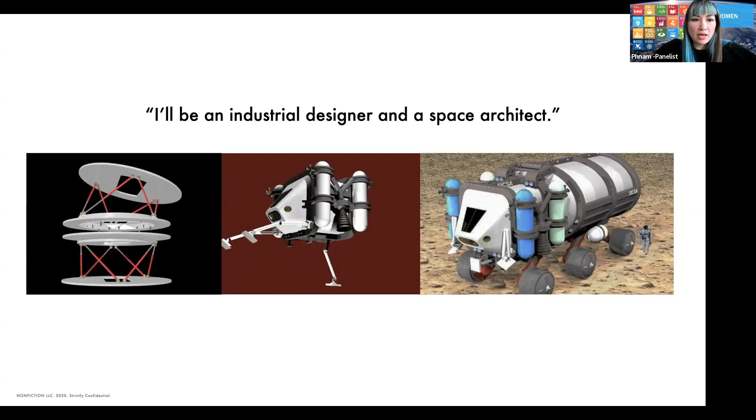This is the type of things we were working on back then. As you can see, fairly classic space architecture - pressurized rovers and hoppers and systems that help dock parts together.

But then a few years ago, after practicing industrial design for about 15 years, I decided to think about what my life purpose was. So after going through a whole exercise, I realized that it was turning science fiction into reality for a better future - thinking about the future as this beautiful thing that we can build for ourselves.

So I started this company called Nonfiction 5 years ago. We're based in San Francisco, and that is exactly what we do. We do more than design, we do more than architecture. We really try to build the world to be this beautiful place.

One way we do it is that we attract clients that have a commitment to at least one of the 17 Sustainable Development Goals put together by the United Nations. Some of them have to do with health and well-being, some of them have to do with gender equality, some of them have to do with the environment or clean water.

Another thing that happened recently is that Nonfiction became a member of MIT Solve, which is the social impact branch, kind of like an accelerator program where we help a team or startups find solutions that can have a positive impact on the entire planet.

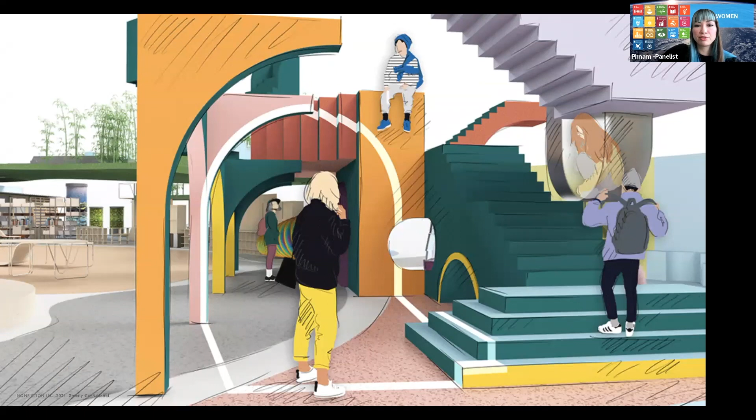We're also redesigning the educational system of the country of Singapore, completely redefining what it means to be in an environment designed to develop your autonomy, your creativity, your critical thinking, and all the tools that will make the future of work a lot more pleasant for everyone. One part of this program was really integrating sustainable practices, exposing children to beautiful sustainable materials and fabrication models they can access, so they can fabricate the world that works for them.

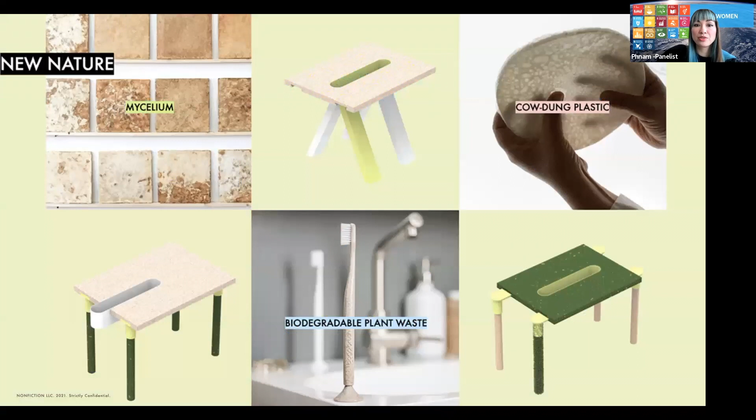And related to materials, Nonfiction is now an official partner of Material ConneXion, and so we host one of the largest sustainable material libraries on the West Coast of the United States.

We also work on the interior of airlines, completely redefining what it feels like to be in first class, business class, or coach, integrating technologies like vibroacoustics, sound technology, scent technology, and nature into the environment, so it becomes more like a spa than just a transportation device. Reinstating pleasure in flight is very important, and integrating technology that supports not only the people taking the flight—on vacation or a business trip—but also the people who work there. Integrating a bar back into flights could be really cool, and why not think about what that could be in space as well.

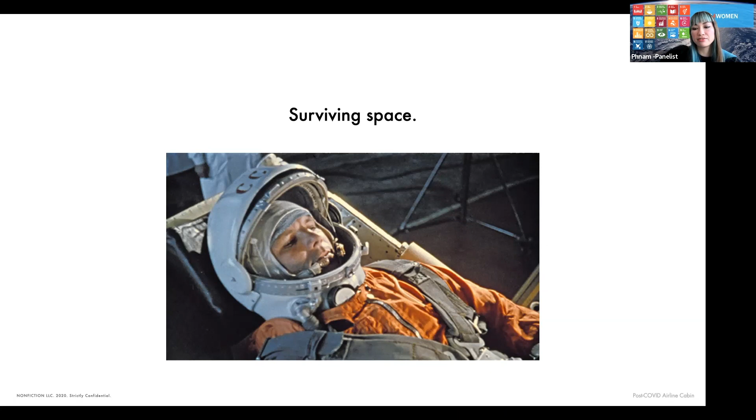So now back to space. The history of space travel, of humans in space, started with surviving space—how do you send a man up to space and bring him back alive? That's what Yuri Gagarin started doing in the 60s. And now you have people living on the ISS.

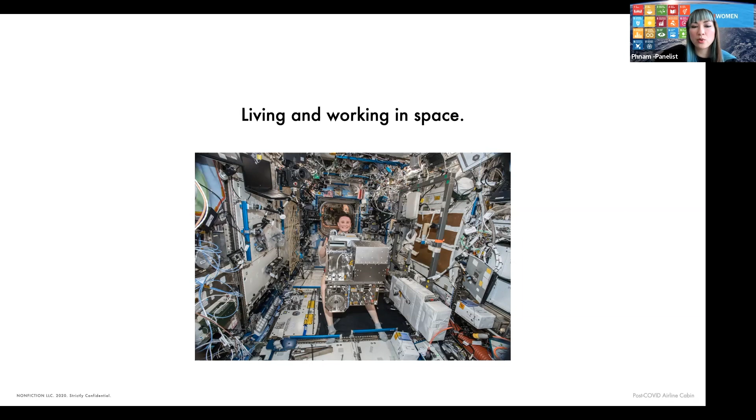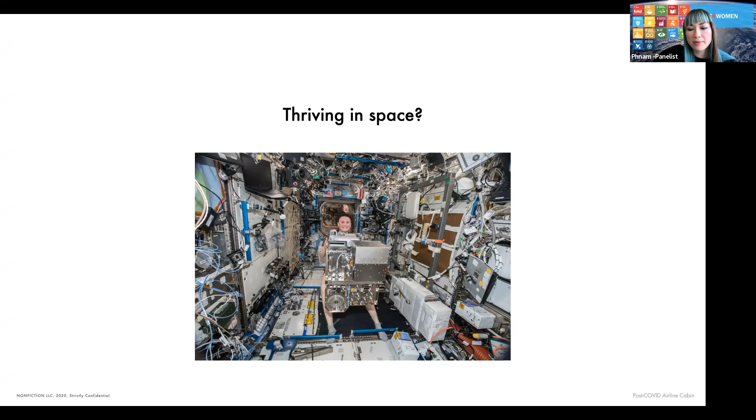It's about living and working. As you can see, the interior of the ISS, as useful as it is for the people doing experiments and living up there, is quite a mess. It's not something that seems pleasant to be around and to float around in, and from the perspective of a designer, I actually find this type of environment to be quite dangerous. So thriving in space, what is it going to look like? It's our job as space architects and designers to figure that out. So let's jump into it.

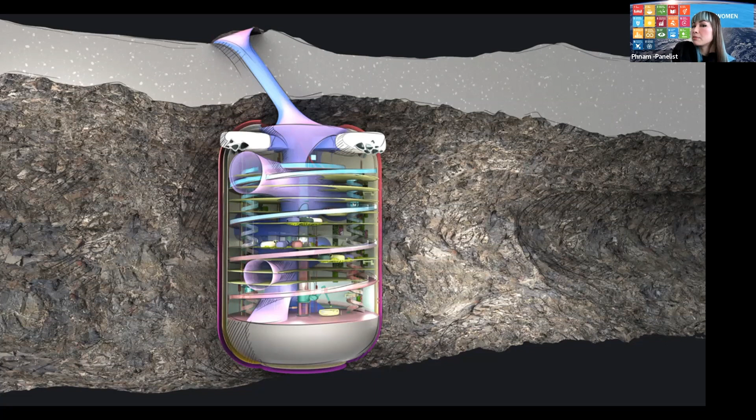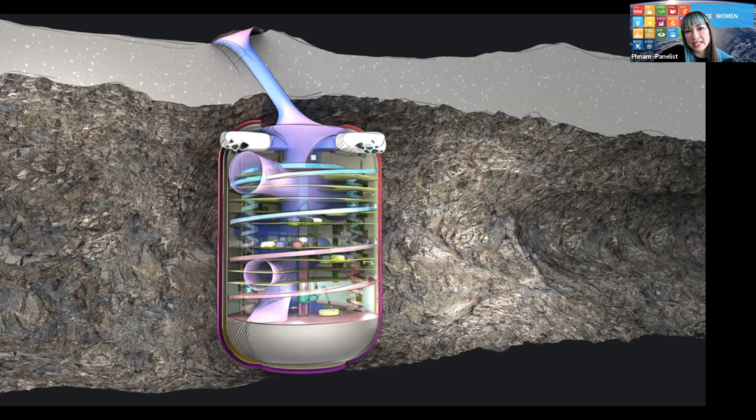So it can be very useful to build underground. And when you build underground, you have control over the entire environment, the lighting, the circadian cycles and all that, by using a set of LED lights.

And when it comes to the interior and the home pods, how do you think about how it feels to be in this environment? So this entire structure is not made for the first return to the moon. This is going to be quite a few decades down the line when we send tens of people to go there and work for long stretches of time. And so when we think of the interior, we think very much of serving the humans who are going to live and thrive in there first.

The human body, for example, does not have any straight lines. So why should we live in an environment that has straight lines everywhere? So let's integrate a lot of these natural shapes, these curves everywhere, integrating nature and textures, things that you can touch and things that feel good when you look at them.

Same thing for the private quarters. When you invite someone in, when you are in your private space, how does it feel to be in there? What kind of colors, what kind of environment, what kind of materials and texture is it going to turn into an environment that feels like home?

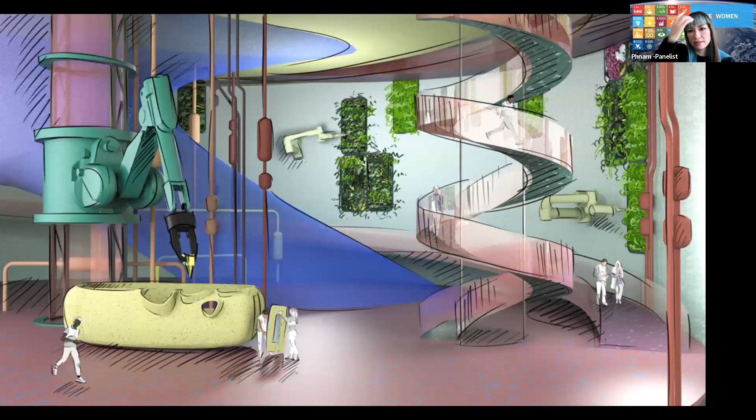And same thing with working environment or fabrication, using 3D printers and that kind of technology to build all of these structures on the inside. Partially using materials sent from Earth, but also using local materials like regolith and mixing them together to create structural materials that allows us to print really cool shapes.

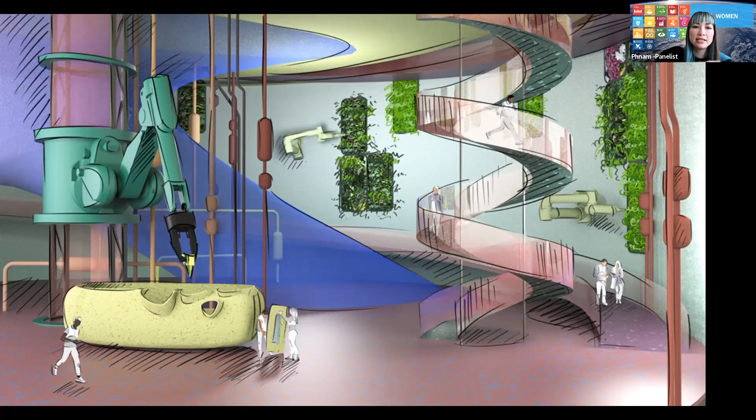And in all of this, integrating as much nature as possible, not only to feed ourselves, but also to create an environment that feels a little bit more like home, even if it's a work environment.

Same thing for resting or working out environment. Why do we have to use tools that look like they were put together in a garage using tubing and parts that are 3D printed? What we can do is really make the workout environment a pleasant environment, using moving tools, and perhaps some of it can be physical, the impression of running on grass, for example, and some of it can be digital to really expand the way we perceive the interior space of this capsule.

And the last project I wanted to go over is actually a project that we did with the WDO and the ISS National Laboratory last October. And it was designed in space for life on Earth. And my team of 14 people actually focused on designing the future of an orbital university.

So all of us 14 people were complete strangers, coming from different places on Earth with different backgrounds. Some of us were architects, some of us were designers, some of us were astrophysicists and systems engineers.

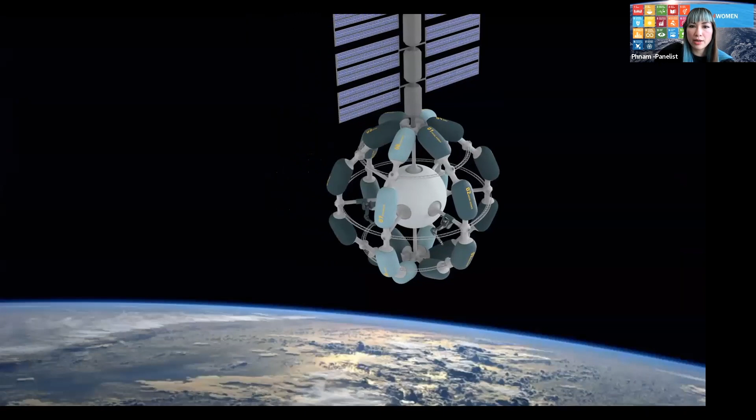And so the way this is built is that you have 3 rings that are connected to each other. And what we would want to do is to give access to each of these inflatable pods to researchers, staff, faculty, and students to have access in space, and really using the microgravity environment to push their research and their development to the next level.

And so one way we thought about it is, growing food in space is very big right now. And for example, NASA has a food challenge out right now.

If you guys want to participate, that sounds super fun.

So how do you bring back pleasure and textures and all those beautiful flavors and scents that make food on Earth so pleasurable? How do we bring that to space? How do we make going to the moon or going to Mars, which is going to take a very long time, make food a very pleasurable aspect of it?

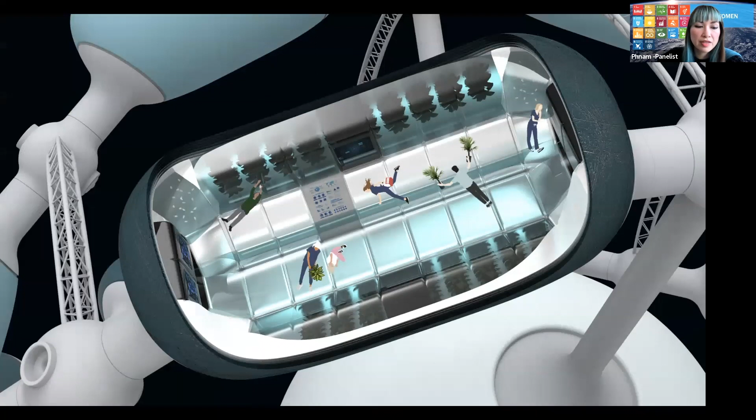The way we thought about it is having a research facility up there that would help grow a wider variety of food. When you think of hydroponics or aquaponics today, the type of food they grow is quite limited, right? You can grow lettuce, capsicum, which are like peppers, some fruits and berries, but you can't eat only that kind of food for the rest of your mission. So creating things like this.

Another thing is art, art in space. What can we do there? There's an artist named Azuma Makoto who has been sending flowers and bonsais and these beautiful living things up to space. There's a beauty in this that we can really replicate with student artists in space. What can you do in microgravity? What are the limits of what art is when you practice it in space and when gravity is not working against your imagination?

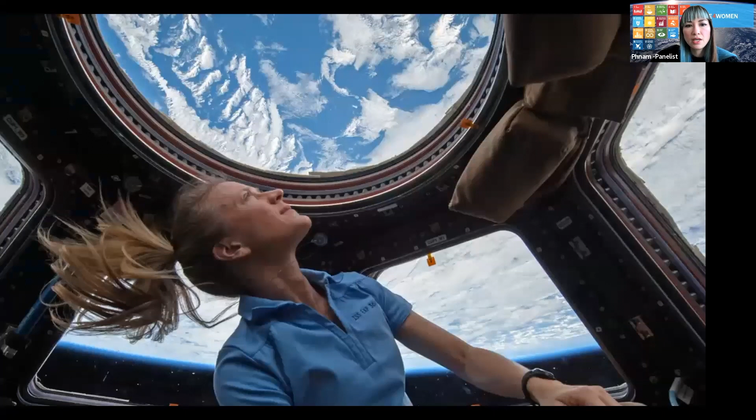So, to finish this whole talk, some of you have probably heard of the overview effect, talked about a lot by Frank White, a sort of space philosopher who has interviewed countless astronauts. Pretty much all of them have experienced this cognitive shift when they go up to space and look back at Earth and realize it is a very small, very fragile place that we as humans have to protect. We have to develop all the technology, on Earth and in space, to help protect this beautiful place that was given to us.

And why are we doing all of this? We're doing all of this for people all over the world, for the next generation, for girls like this girl who lives in India and dreams of space and wants to use space technology when she grows up to help the community she lives in. There's countless people when you talk to people in Nigeria, in Ghana, in India, in South America, everywhere. The kids are very excited about space and they want to be part of it, and they understand that going to space is going to be making life on Earth a lot more beautiful and a lot more human.

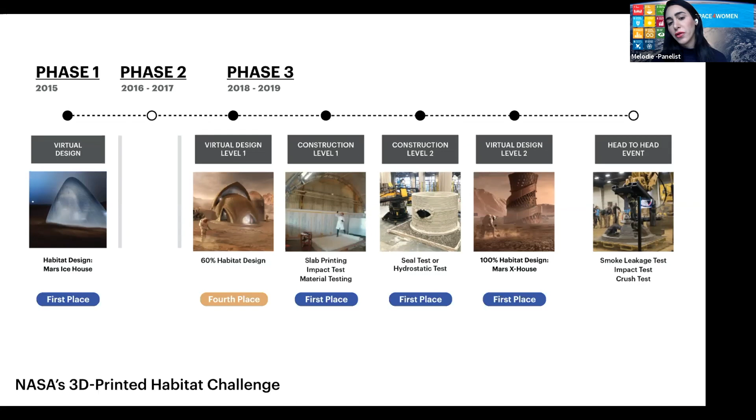This was the trajectory of my involvement in the 3D Printed Habitat Challenge. In phase 1, this was a collaboration between Clouds AO and SEArch+, and in phase 3, a collaboration between SEArch+ and Apis Cor. We competed in both the virtual design levels and the construction levels, and I'll tell you about some of these projects shortly.

Mars Ice House was the first prize winner in the phase 1 3D printed habitat competition. This was a design proposal for a 3D printed ice shell contained within a precision manufactured ETFE inflatable membrane. In this section perspective, you can see a double ice shell surrounding a vertically oriented lander, with the ETFE containing these elements and the shell structure so the ice doesn't sublimate on the surface of Mars.

This is a view of the top floor of that lander, where we imagined vision windows through the ice so astronauts could see the Martian landscape around them. And here's a view of the structure at night.

We were interested in the idea that the ice shell itself could provide translucency to the outside, providing natural light so astronauts could maintain their circadian rhythms. We were also interested in the potential for the ice to act as a superior radiation shield compared to other traditional materials used in space structures, since water, being hydrogen rich, is a better shield against galactic cosmic rays and solar particle events.

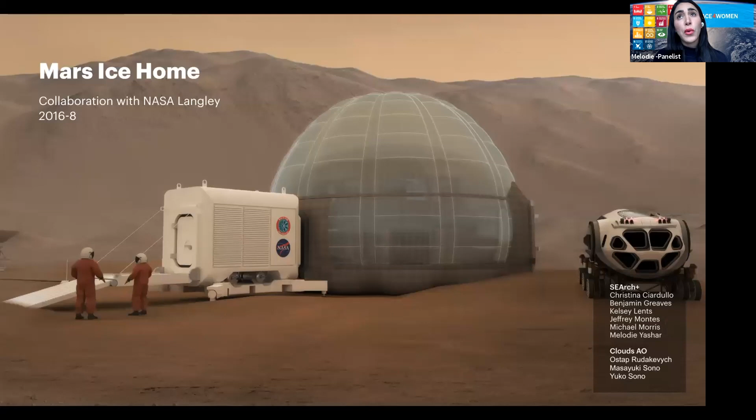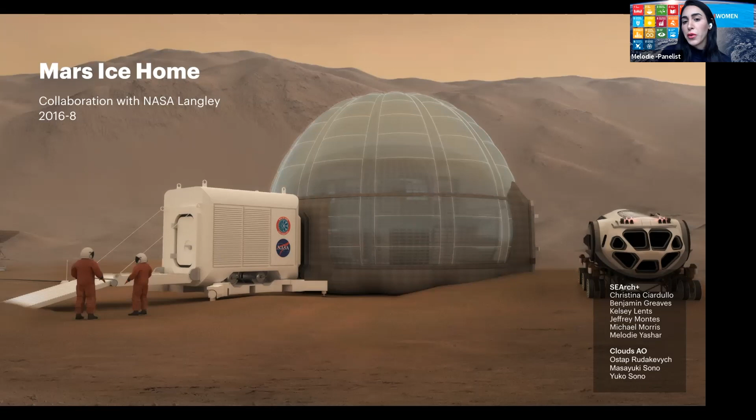Fortunately, we were able to connect with a principal investigator at NASA Langley who was interested in the idea of an ice home, and together we collaborated on this concept for Mars Ice Home, which is not a 3D printed habitat, but in fact a filled and frozen ice shell structure.

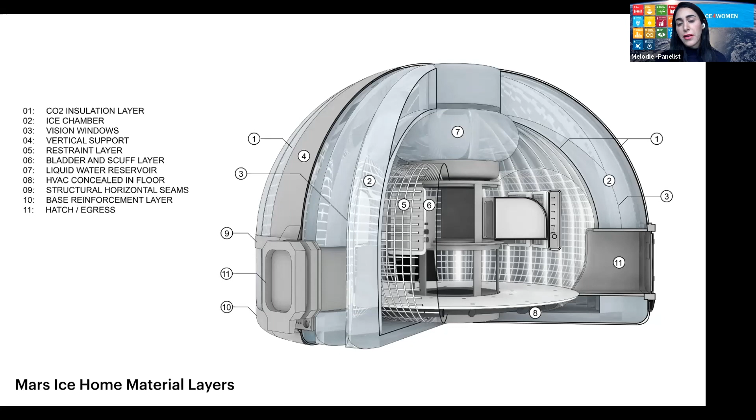So here you'll see, again, in a section perspective, that we are imagining multiple material layers—bladder, restraint, and support layers—for this inflatable membrane that can contain vertically oriented ice shells. And in this section, you'll see that we've introduced some basic programming for a crew of 4 astronauts to live on the surface of Mars within this ice habitat.

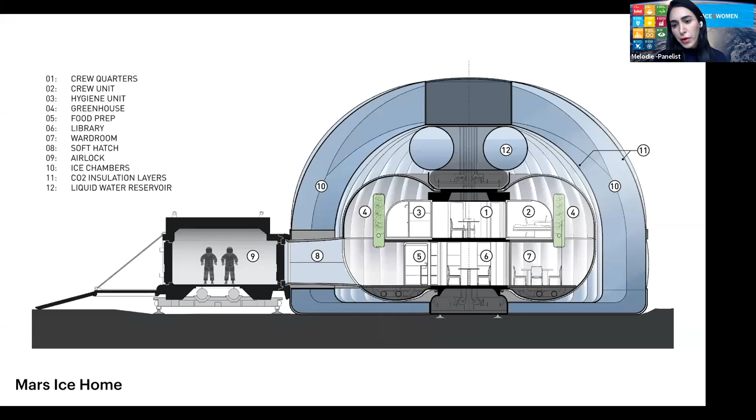But we didn't get too specific about what exactly the concept of operations would be for the mission or for the astronauts themselves. We sort of insinuated that this large adaptable workspace could be suited to whatever activities would be coming their way. We also insinuated that there could be some greenhouse element incorporated within the habitat, not really thinking to what that might lead to.

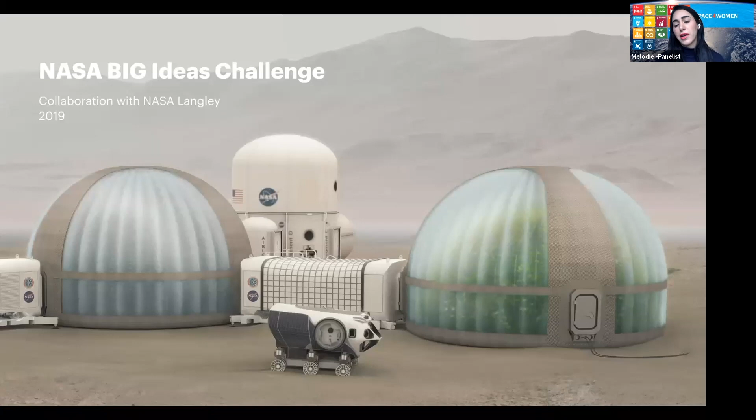But eventually, the PI from NASA Langley came back around to us and remembered that we had suggested a greenhouse could be incorporated within the habitat, and that inspired the NASA Big Ideas Challenge, a university competition that I helped co-organize along with SEArch+ and NASA Langley to introduce a concept for a sustainable Martian greenhouse that could be connected to the ice home concept and to some of the existing infrastructure developed for the ice home. So that's a little bit of the work spinning off from the phase 1 3D printed habitat challenge.

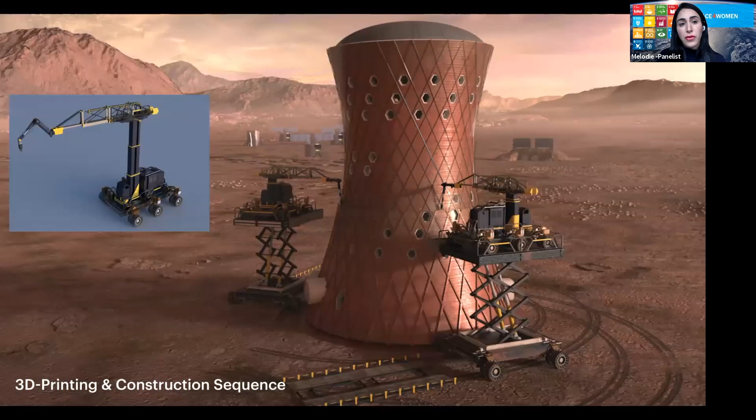We were working with Apis Cor at the time, and together we came up with this schematic for a robotic printer that could be deployed from the Hercules single stage reusable vehicle. And we came up with an initial concept of operations for how 2 of these printers could actually construct the habitat.

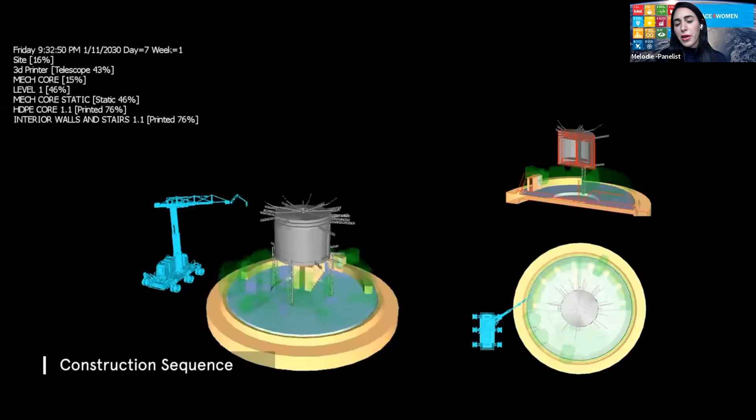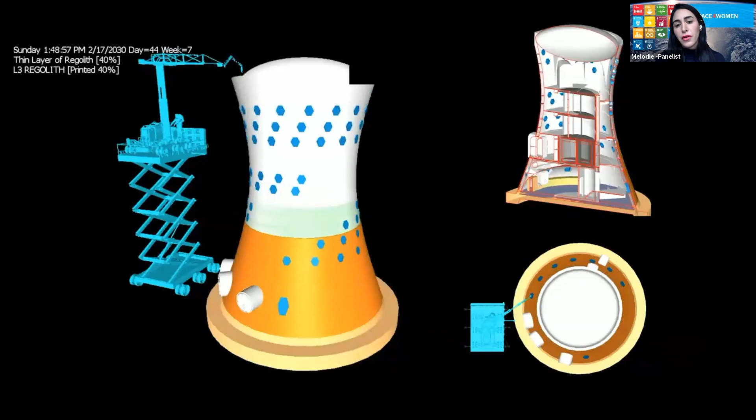And this is the construction sequence, the concept of operations for how 2 Apis Cor printers—even though you'll only see 1 here—would essentially work together to construct the habitat and integrate all of the relevant components, such as windows, airlocks, suit hatches, and other hardware and interface components. The white material you'll notice is the high density polyethylene, followed by the sulfur regolith-based concrete that is 3D printed on the outside. Then we introduced basalt fiber reinforcement, which you'll see in just a moment.

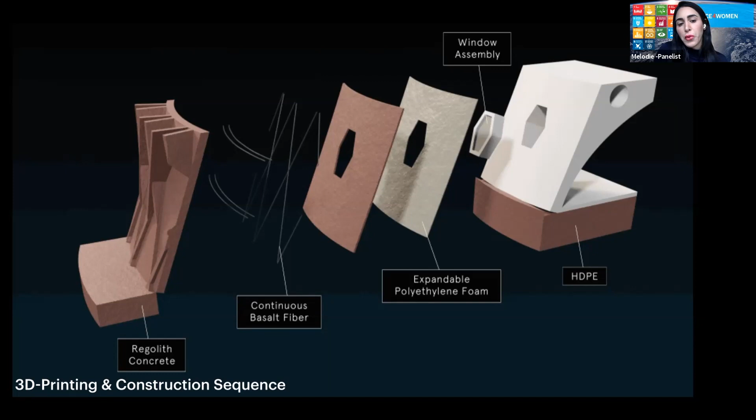So in this material breakdown, on the far right you'll notice the high density polyethylene, the window assembly for the habitat so that astronauts can actually look outside. We introduced expandable polyethylene foam for thermal expansion and contraction between the materials. Then we have the sulfur-based regolith and continuous basalt fiber for reinforcement—this is the material system and composite wall of the habitat.

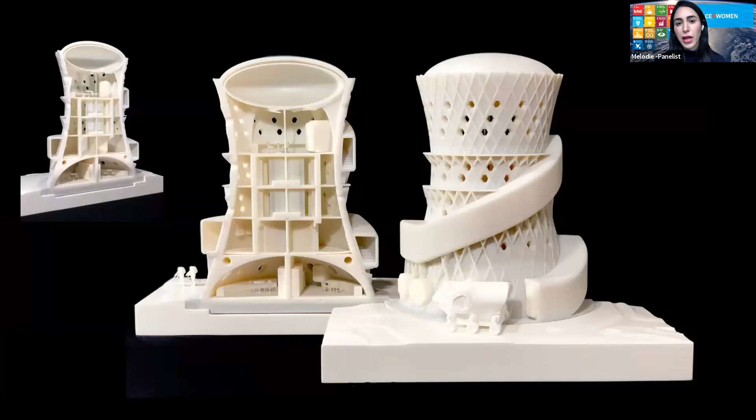This was a 3D model that we actually created for the sake of the competition. This was being exhibited at the London Moving to Mars exhibition, which is a fantastic show that if you guys have not heard about, I would advise that you take a look into. The exhibition catalog is really beautiful.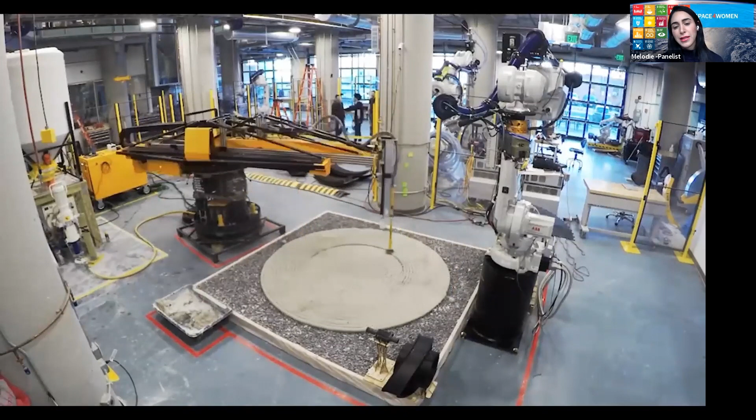And here is basically the submission that ourselves, SEArch+, and Apis Cor conducted for Construction Level 2 of the 3D Printed Habitat Competition. The competition in Phase 3 was split into virtual design, which I just showed you Mars X-House was the winner and final design for, and construction levels of the competition to show that these habitats and structural elements can actually be built.

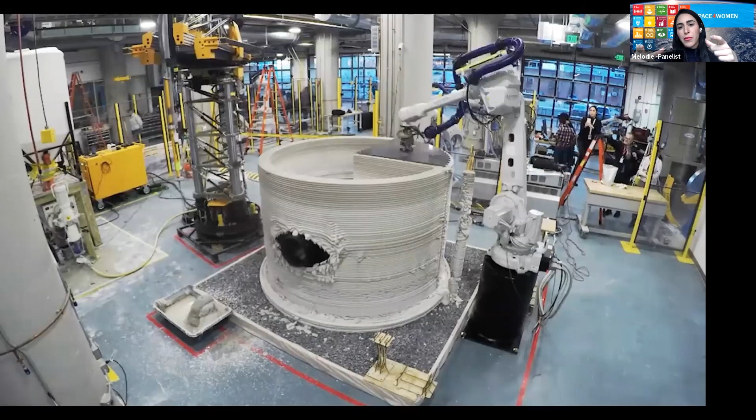This was a demonstration that the competition was asking us to do, where we were showing that we can 3D print a water basin, this glorified concrete jacuzzi, and robotically insert a couple of interface elements: these two pipes, a large pipe on one side and a smaller pipe on the opposite side of the structure, and at the very top, a small portion of a roof. The idea is to show how the 3D printer can interface with other robotic emplacement activities.

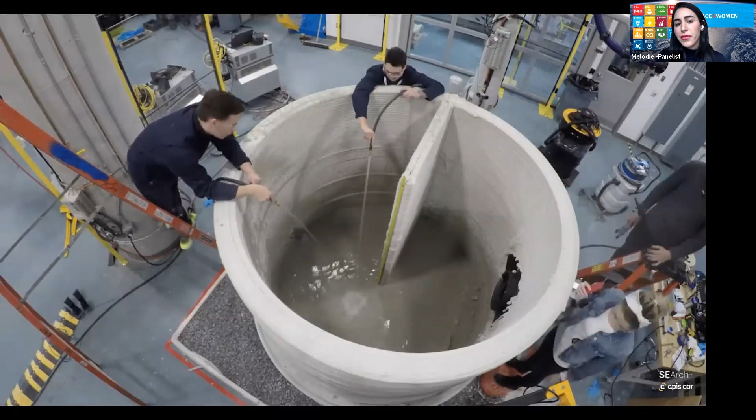And then this was us filling the structure. We only filled it 20 centimeters, but that was enough for us to win first place within the competition, because almost all of the other structures leaked after they were printed, and there was no caulking and no sealing done before we filled the structure. So that was very exciting.

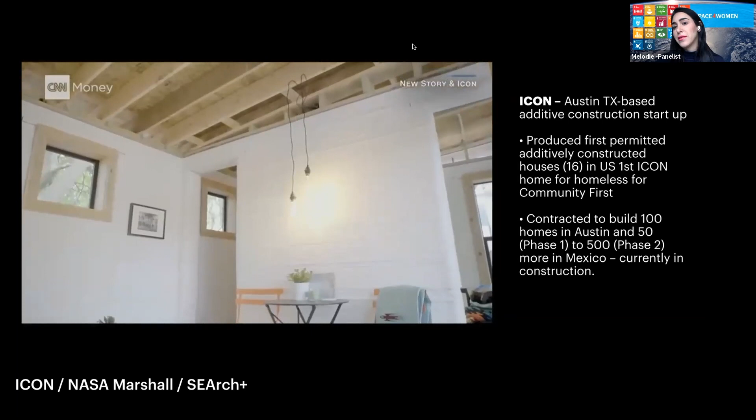And now to conclude, I recently finished a project with SEArch+ as well as ICON and NASA Marshall, which is being affectionately known as the MMPACT project, the Moon to Mars Planetary Autonomous Construction Technology effort. This is a multi-team university, industry, and NASA-based effort to realize construction technologies for the development of a permanent lunar base. ICON is an Austin-based additive construction startup.

They are known to have produced the first permitted additively constructed house in the US, and they are leading the way in collaboration with NASA Marshall to realize this technology within the next decade. These are the phases planned for the MMPACT project. Phase 1 is an initial demonstration on the lunar surface of additive manufacturing technologies. Phase 2 will be an initial demo of a critical infrastructure element, and Phase 3 will be full-scale development of additive construction of lunar infrastructure. In particular, we're looking at landing pads, roadways, and habitats.

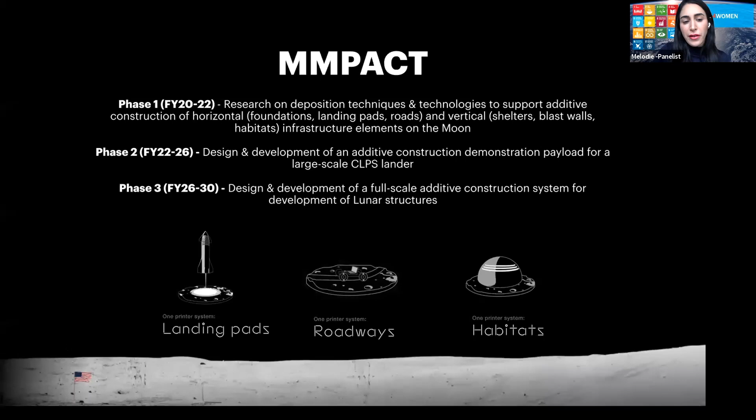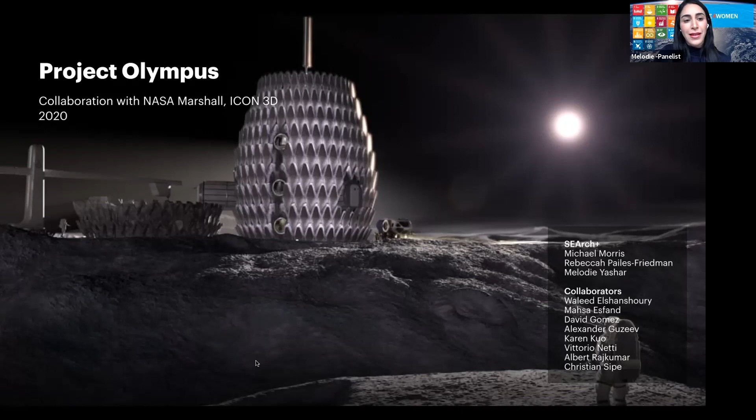Landing pads will be the first thing that we deliver together. This is an image of the landing pad design that SEArch completed with Icon 3D within a schematic design phase, as well as an image of the Lunar Lantern, which is a habitat design proposal that SEArch completed with Icon and NASA Marshall very recently. Hopefully I'll be able to share more on this project later. But for now, that is what I have for you today.